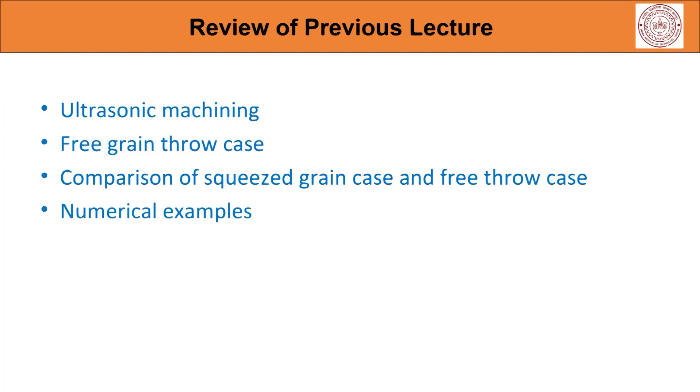So, today we will now look into one of the first fundamental mechanical non-conventional processes called the AJM or abrasive jet machining. As I have already illustrated in my previous lectures, a non-conventional domain can be split up into either mechanical removal of material or thermal removal of material or chemical / electrochemical removal of material, meaning thereby that the way and means in which material removal would take place by supplying energy of different forms makes these categorizations happen.

So, in mechanical removal of material, the energy mostly supplied is mechanical in nature, and that can be the impact of abrasives or small grains of relatively higher hardnesses which can impinge into a surface and try to remove off the material by brittle fracture. So, let us look at one of the fundamental processes, AJM or abrasive jet machining.

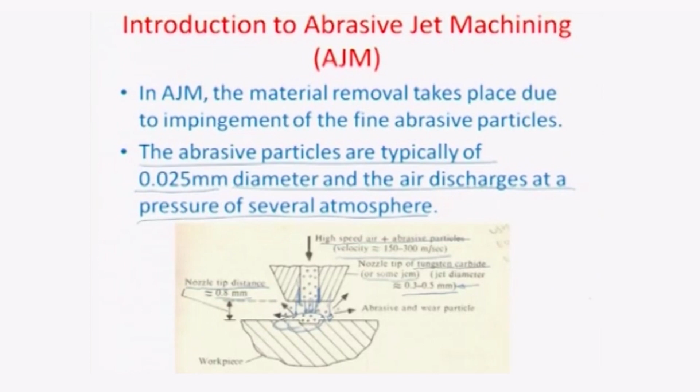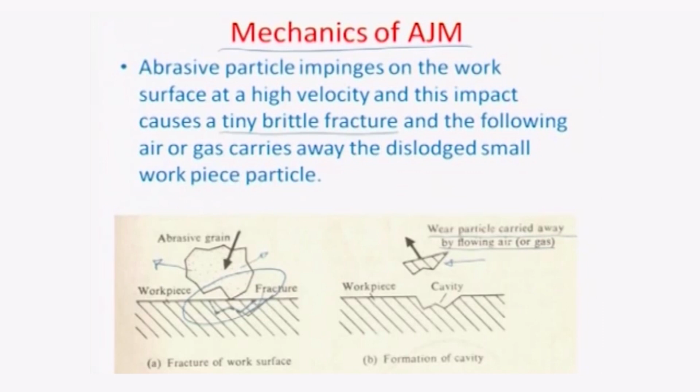So basically it is fracture by fracture happening in succession for a cavity to be created within the workpiece. As you can see here, the wear particle is carried away by the flowing air or gas in this illustration. If you look at the process more closely, it is more suitable when the work material is brittle or fragile, because then it automatically promotes brittle fracture.

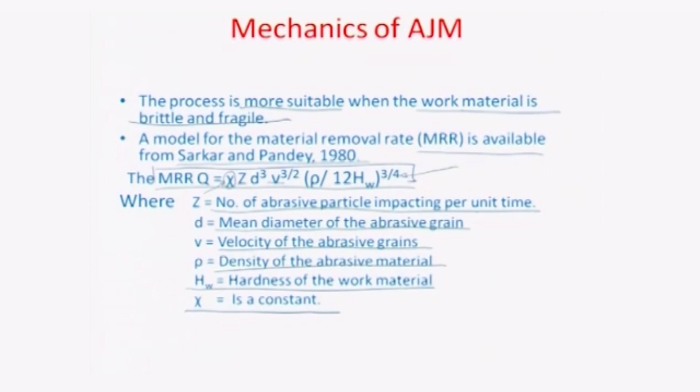So the material removal rate of an AJM system is proportional to the cube of the mean diameter of the abrasive grain, which is obvious because it gives an idea of how much volume is dislodged by looking at the volume of one grain. Z is the number of abrasive particles impacting per unit time, meaning if you have more particles moving at a higher velocity, there would be a velocity contribution to the MRR. And if the abrasive is closely packed, highly loaded onto the flowing gas, that also increases the material removal rate. The other important parameters are the hardness of the work material and the density of the abrasive material. So that's about the mechanics.

Regarding the process parameters in abrasive jet machining, you can evaluate the process by characterizing the material removal rate, MRR. You can also characterize the process by the geometry of the cut, by the surface roughness produced, and by the rate of nozzle wear. Any good machining process would typically need a lower wear rate, meaning the nozzle has a better working life. It should produce low roughness surfaces, be able to machine complicated geometries, and the MRR should be higher.

The major controlling parameters for these process characteristics are, for example, the composition, strength, size, mass and flow rate of the abrasive material. What is the hardness level of the abrasive with respect to the workpiece you are machining? What is the size of the grains, because the MRR typically depends on the cube of the grain diameter? What is the mass flow rate of the abrasive, which indicates the numbers per unit time? If you pack the grains more, increasing the mass flow rate, you are basically increasing the Z value. And the composition is also very important, as is the quality of the gas flowing with the abrasive, or whether it has its own etching effect on the surface being machined.

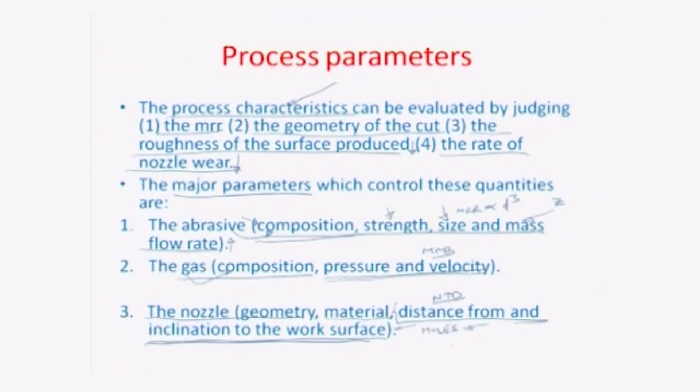with respect to the work surface. For example, in some cases where holes need to be etched in an inclined manner, this would be the best process available for creating such micro holes and micro features within materials, particularly from MEMS aspects.

So, when we look at the quality of the abrasive, mainly there are two types of abrasives commonly used in the industry: aluminum oxide and silicon carbide, and the diameter, as we already mentioned, is very often in the 10 to 50 micron range, although 25 to 30 microns is what is most commonly used. For good wear action on the surfaces, the abrasive grains should have sharp edges, because the sharper the profile of the grain, the better the impingement of these grains on the surface, and typically the higher the MRR because of that.

The reuse of abrasive powders is normally not recommended, because as you are machining the surface with an abrasive jet, there is continuous material removal. So, the waste collection unit for this whole system would have the metal which has been removed as well as the grain along with it. And after a while, when the grain gets completely loaded with metal, it is very difficult to filter out or clean the grains out of the metal, because the metal undergoes a very high level of deformation and sometimes brittle fracture as it is removed.

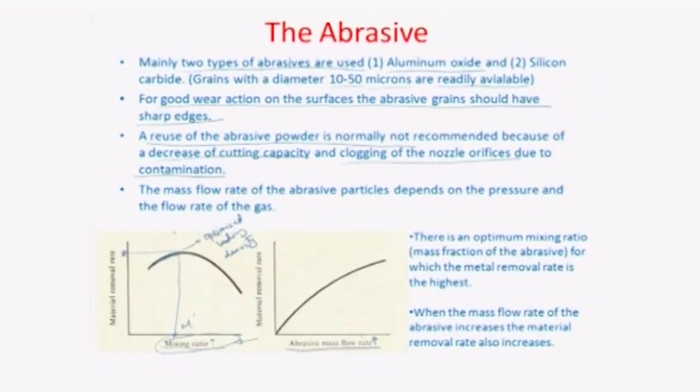So there are some other interesting factors, like for example, if the abrasive mass flow rate is increased, the material removal rate would almost always increase because of the increased Z, the number of particles which are impacting per unit time, which would increase because of the abrasive mass flow rate. So this is kind of all about how you design or select the abrasive for operating the process.

The other aspect which is involved is the gas, which is actually the most important component sometimes in the AJM process. Typically the AJM unit normally operates at a pressure of about 0.2 to 1.0 Newton per millimeter square, and the composition of the gas and a very high velocity has a significant impact on the MRR, as you have seen before in the Sarkar and Pandey's MRR estimation method, even if the mixing ratio is not changed. So if you are not loading any more abrasives per unit volume of the air, still it does have a very significant effect.

Sometimes there is this automatic softening which is created by the gas because it may have some derogatory impact onto the surface that it is impacting, and so it makes brittle fracture more prominent because of this pre-processing of the surface. So because of all this, the gas really is a very important component.

The other important component is the nozzle in abrasive jet machining, and the nozzle materials, as we have already repeatedly mentioned, should be hard. Typically tungsten carbide or sapphire aluminum oxide can be very suitable materials, and tungsten carbide may have an average lifetime of about 12 to 30 hours, whereas sapphire may have approximately 300 hours or so. So sapphire is in fact much harder than tungsten carbide.

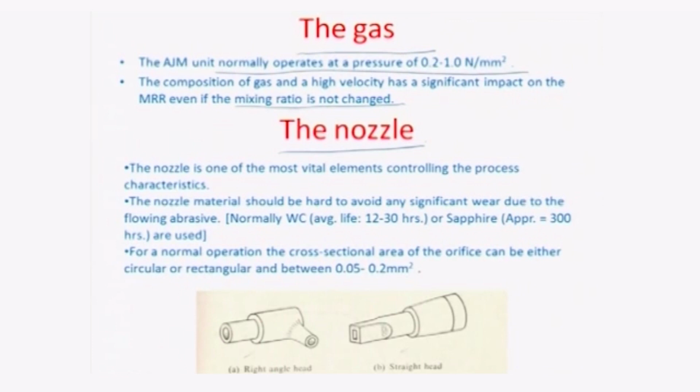So normally for standard operations of the industry, the cross sectional area of the orifice is circular in nature, or it can sometimes be rectangular, and the orifice can have an area of about 0.05 to 0.2 millimeter square or so in terms of that small cross section through which the jet actually emanates out onto the workpiece. So these are some of the important aspects of the AJM process.

In summary, you need to know about the abrasive particles, the selection of that. You need to know what the carrier gas is and what the composition of this carrier gas is. You also need to know about the operating pressure and the velocity of the gas, and then of course, a very important part is also the nozzle from which the jet emanates.

Let us look at some other important aspects of AJM. As I told you before, there is this term called standoff distance or nozzle to tip distance, and it is self explanatory as given in the description here: it is the distance at which the nozzle rests with respect to the surface which you are machining.

So obviously in between the nozzle and the surface there is full atmosphere, there is air around, and it is intuitive to see that as this distance keeps on increasing, the air resistance between the nozzle and the workpiece to the particles impinging out of the jet would also increase, thereby reducing their velocity. Although there are two different factors which would interplay here.

One is that if you are shooting a particle out of a jet at a high velocity and at some acceleration value because of the impact of the jet, the acceleration is going to take this particle to a higher velocity if the distance that you are allowing it to move is more. As you know, v squared minus u squared equals 2as, keeping acceleration constant. With initial velocity u equal to 0, the final velocity that you can achieve is proportional to the root of the distance.

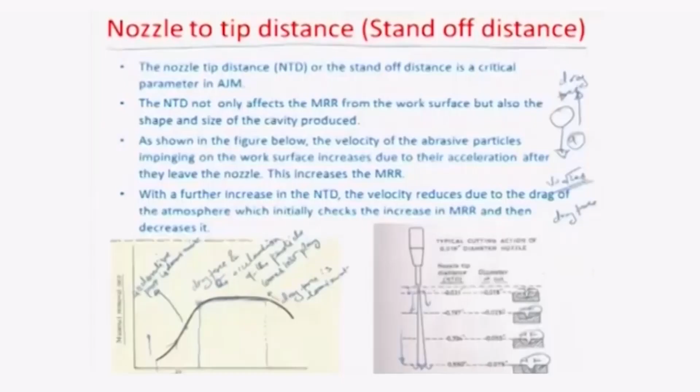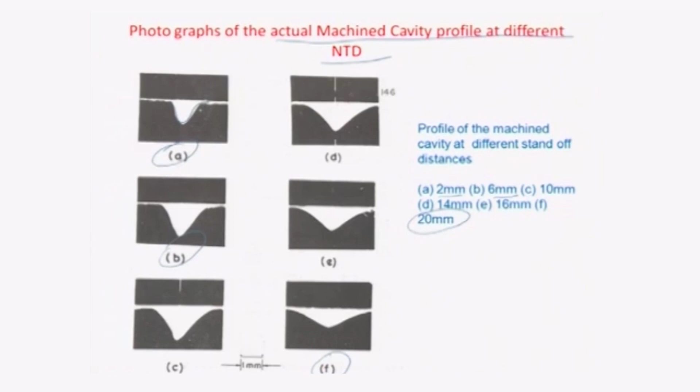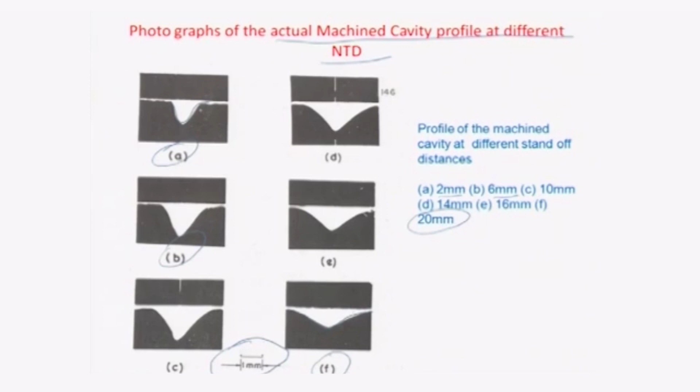We would just like to illustrate some more examples. Here you can see photographs of an actual machined cavity for different nozzle tip distances: 2 millimeters for figure A, 6 millimeters for figure B, and so on, up to 20 millimeters for figure F. You can see that the spread of the cut profile happens because of a higher nozzle tip distance. These are real experimental results, where this 1 mm shows the scale of the photographs.

I already discussed in great detail the mixing ratio and its influence on the material removal rate of the process. The mixing ratio, as I earlier defined, is this quantity here: the volume flow rate of abrasive particles by the volume flow rate of the carrier gas. So, if you are loading more, this mixing ratio goes up and vice versa.

So, we can denote this as UA, U abrasive. A is the subscript for abrasive, the dot meaning the volume UA coming per unit time from the nozzle surface, and UG dot is the volume flow rate of the carrier gas.

Okay. And in place of the mixing ratio, there is another parameter called the mass ratio alpha, which may be easier to determine sometimes, and it is given by the ratio between the mass of the abrasive and the mass of the abrasive and carrier gas. So, because it is mass, it is typically a function of the abrasive mass flow

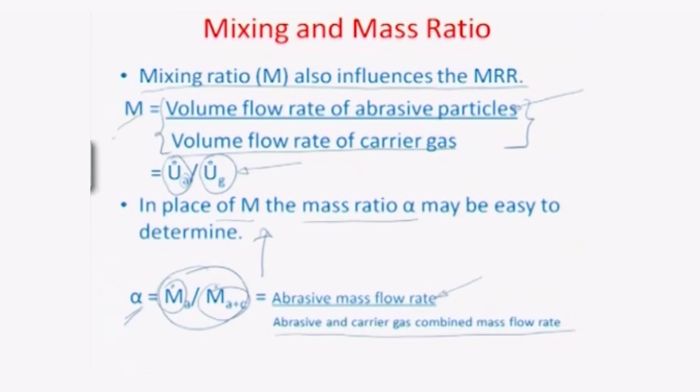rate, this is m dot in both the cases, and this is the abrasive and carrier combined mass flow rate. So, it is a ratio between the two, and you can actually interconvert between alpha and M, provided you are given some parameters. I would like to show you one or two example problems where we calculate this. So, during an AJM process, for example, the mixing ratio used is 0.2, and I have to calculate the mass ratio if the ratio of density of the abrasive and density of the carrier gas is given, and it is equal to 20.

Okay. So, here we know the mixing ratio already from the earlier definition as VA dot by VG dot. This is the volume flow rate of the abrasive, this is the volume flow rate of the gas, and we also know that the mass ratio alpha is given by the mass flow rate of the abrasive by the mass flow rate of the abrasive and gas taken together. So, if we just do a simple calculation here, the mass flow rate is nothing but the density of the abrasive times the volume flow rate of the abrasive.

Okay. So, let us say rho A is density of abrasive and VA dot is volume flow rate of abrasive, and this can be written down as the density of abrasive times volume flow rate of abrasive plus density of the carrier gas times the volume flow rate of the carrier gas. That is really the mass flow rate of the abrasive gas mixture, and that is really what alpha is. And so, the mixing ratio, which is given to be equal to 0.2 in this question, is somehow embedded in this term for the mass ratio.

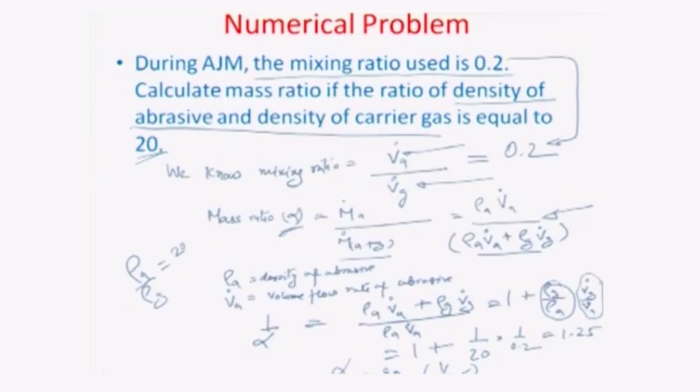Let us do another numerical problem on AJM. In this illustration, the diameter of the nozzle is given as 1 mm, and the jet velocity is given to be 200 meters per second. And so, you will have to find the volumetric flow rate of the carrier gas and abrasive mixture, just for estimation's sake from a practical problem. Okay. So, fluid mechanics teaches you that cross sectional area times velocity becomes the volume flow rate. In this case it is a circular cross section.

So, the cross sectional area of the nozzle is given by pi times the square of the radius, and of course, we convert it into the CGS system, so centimeter square, and the volume flow rate has to be estimated in centimeter cube per second. So, we are converting everything into the CGS system, and the velocity of the gas is 200 times 10 to the power of 2 centimeters per second.

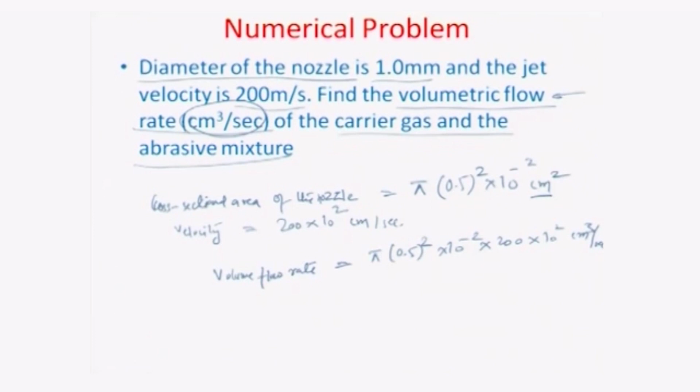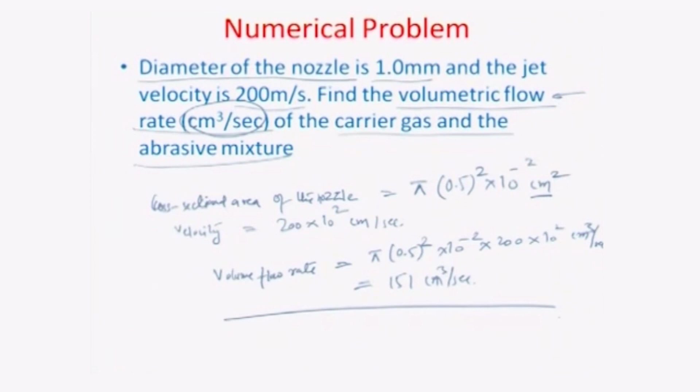So, the volume flow rate equals the cross sectional area times the velocity in centimeter cube per second, which is actually equal to about 151 centimeter cube per second. So, this way you can compute the various aspects of an AJM process, and you can use that further for MEMS applications.

If you look at the details of the system here, this schematic is very well illustrative of what all components go into an abrasive jet machine. So, you have a compressor unit here, as you can see, which would give out pressured air, high pressure air, and then there is of course a drainage port which ensures that the pressure is maintained within a certain level. There is a relief valve also which has been given into this chamber, which contains the air at high pressure.

And then of course, there are some other aspects like the air filter cum dryer, which is used for circulating the air into the chamber for cleaning it, and then once this compressed air is stored in this particular tank here, you can monitor the pressure of this by a gauge which is fitted towards the end of this compressor tank, and you have another opening valve for this air to proceed further in this direction,